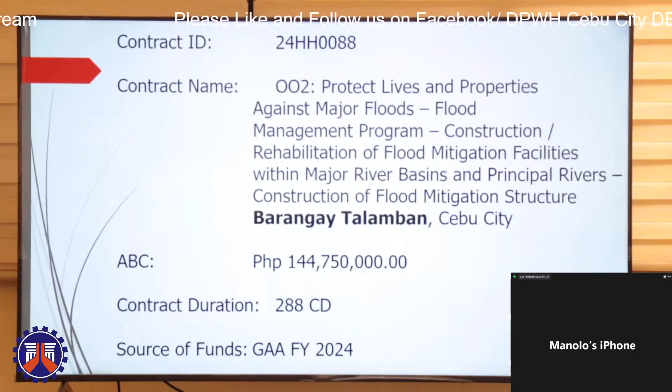So let me discuss first the contract ID 24HH0088 with the contract name OO2: protect lives and properties against major floods, flood management program, construction and rehabilitation of flood mitigation facilities within major river basins and principal rivers, construction of flood mitigation structure, Barangay Talamban, Cebu City, with an ABC of 144,750,000 and a contract duration of 288 calendar days.

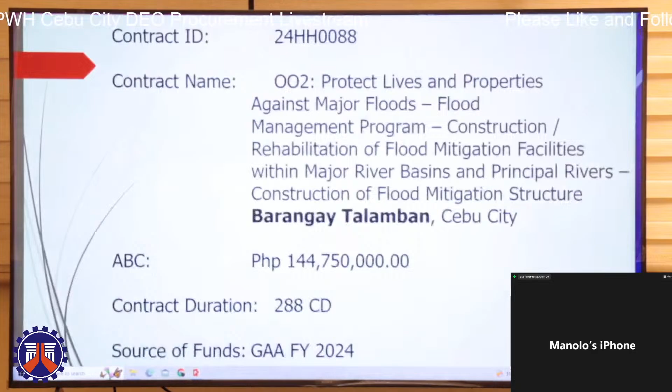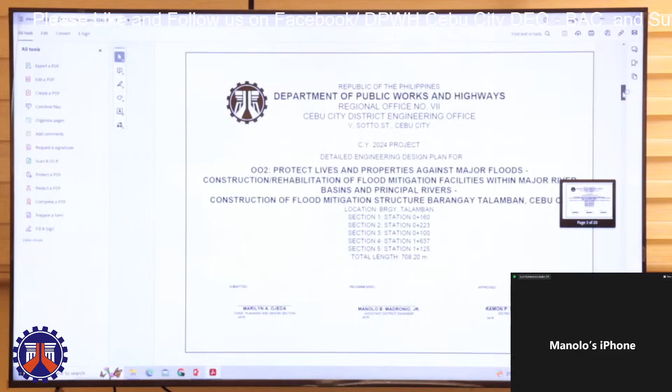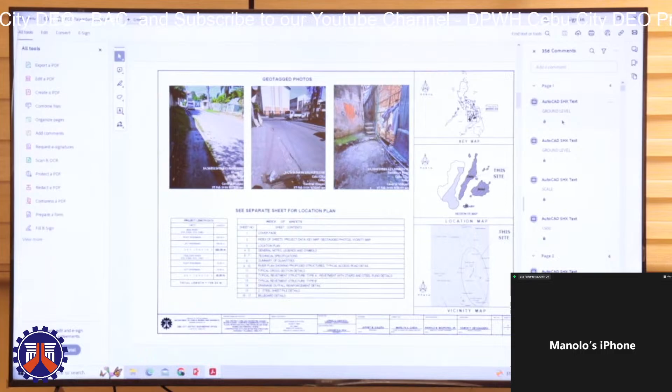So for the detailed plan, we have five sections for this project with a total length of 708 meters. So the first location is along the Butuanon River.

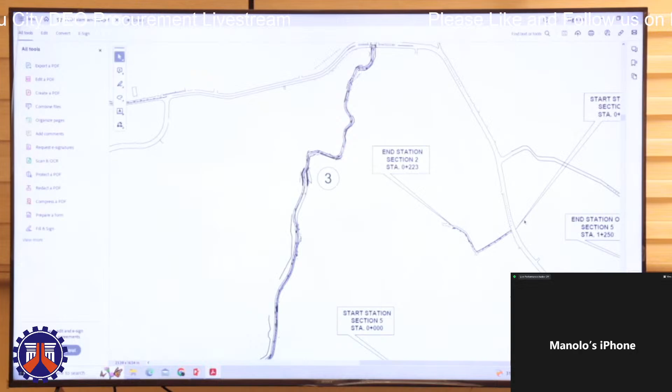So this is the general notes, the construction notes, the technical specifications, then the summary of quantities. First we have the provision of combined field office equivalent to the total contract duration of 9.6 months. We have the operation and maintenance of temporary field office. We have included provision of survey equipment for the assistance to the engineer - kindly visit the technical specification sheet to verify the specs we require for the survey equipment. Then we have the provision of communication facility for the engineer. Next we need to provide permits and clearances, project billboard, safety and health program, mobilization and demobilization.

We have to provide the access road for when going down to the river area. For the main items, we have reinforcing steel grade 40 with a total quantity of 65,987 kilograms, and structural concrete 3,000 PSI Class A, 28 days, 2,314 cubic meters. We have fill and backfill, pipe culverts and drain excavation, grouted riprap, structural steel sheet piles furnished and driven. We also provided pipe culverts in two sizes: 910 mm or 36 inches, and 1.5 meter or 60 inches. Then we have concrete covers, manholes, and metal frames and gratings.

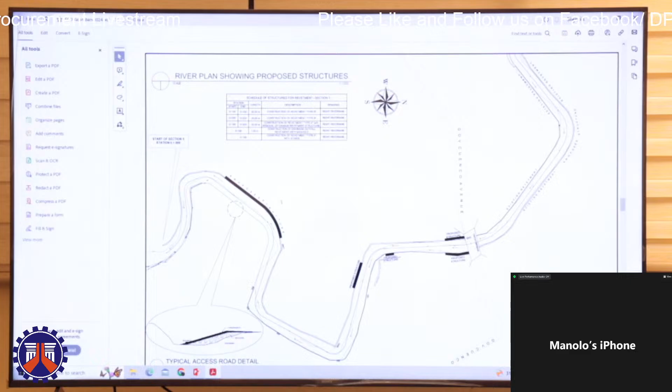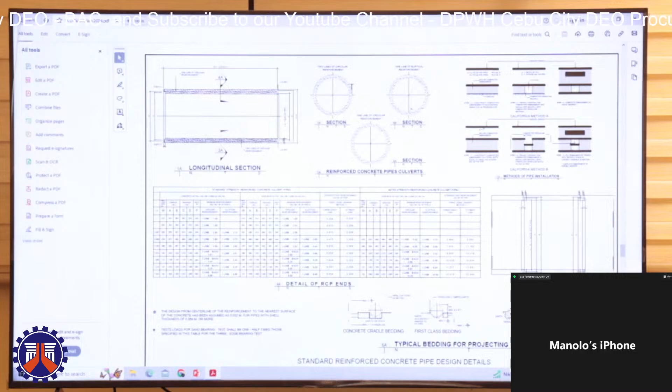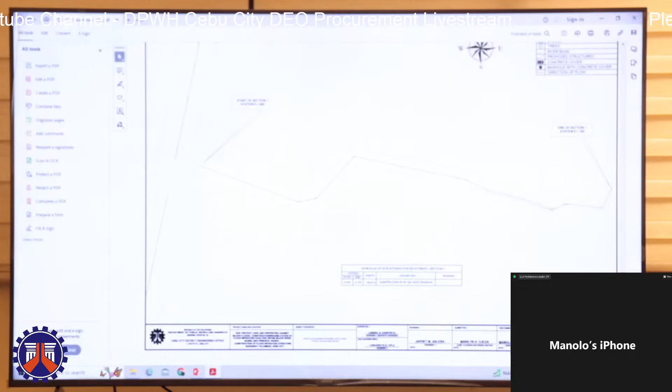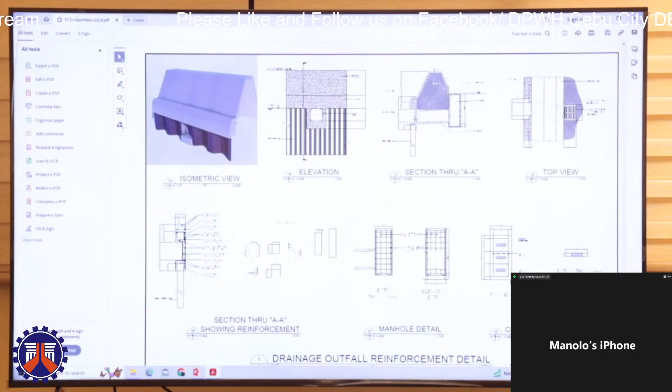Then we have the manholes and drainage detail. I think that's all for the flood control project. So Engineer Felicis will continue for the road project.

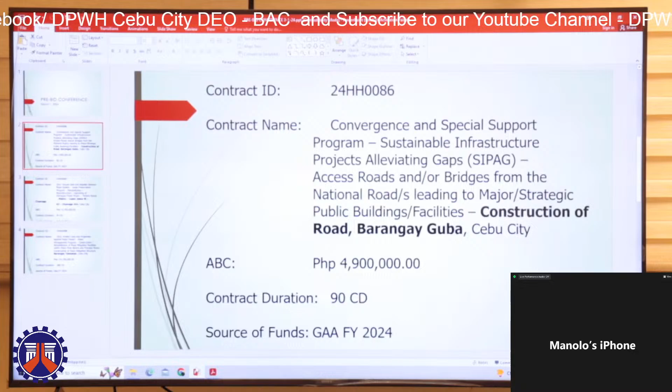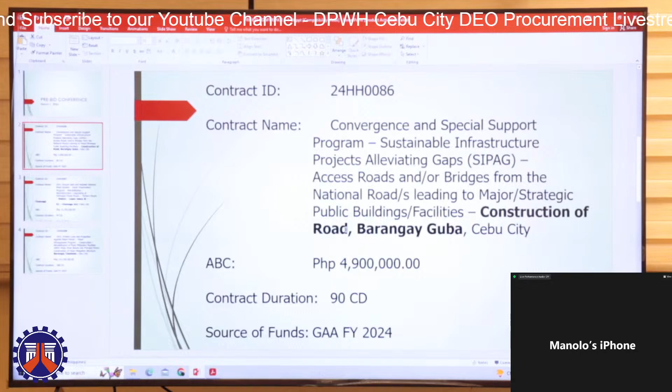Okay, to continue, good afternoon. Next, we have two road concreting projects. First, we have contract ID 24HH0086, construction of road, Barangay Guba, Cebu City. The approved budget for the contract is 4,900,000 pesos, to be completed in 90 calendar days.

So this is the detailed engineering design plan. For Barangay Guba, we have only one road section, right? The length is 350 meters.

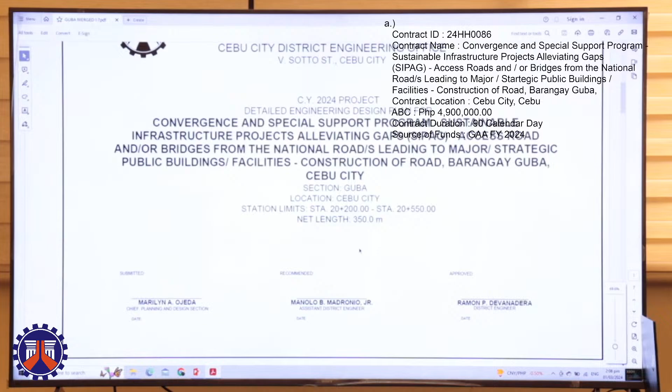Okay, so for the location, the shaded area or region is this one. This road alignment is close to the Guba Barangay Hall. We have taken photographs on site.

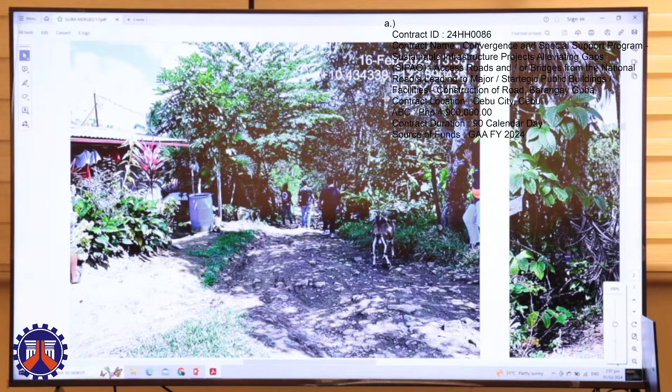This is the area to be cemented. Please take note of the coordinates if you're going to use this. You have to input it in Google Maps to get the exact location.

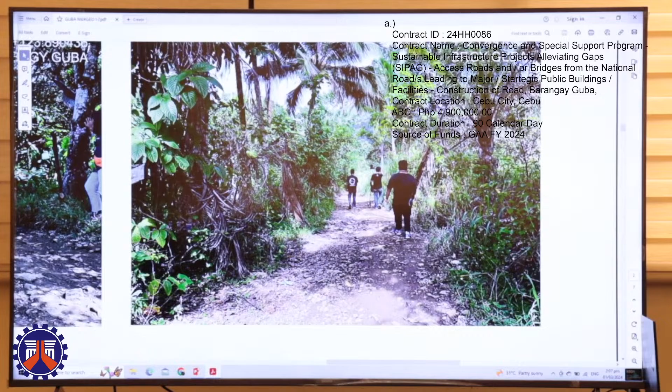So this is the current situation on site. Another presentation of the location through Google Maps, close to Happy Gardener's Place. This is the area for the road concreting project.

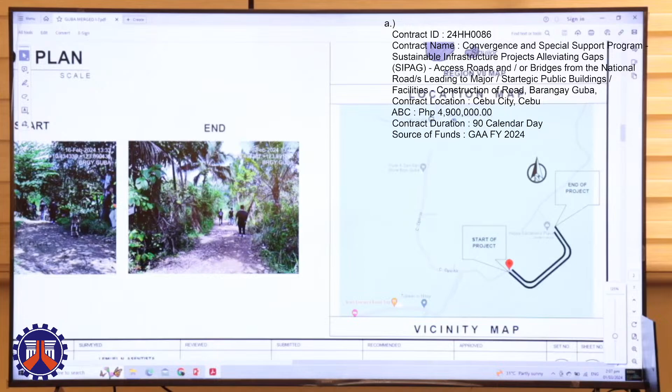For the summary of quantities, we have the general requirements: combined field office, operation and maintenance, permits, clearances, DPWH billboards, GOA billboards, safety and health program, traffic management, mobilization, and demobilization.

For the civil works items, this includes removal of structures or obstructions, the existing RCPC, surplus common excavation, pipe culvert and drain excavation, embankment, subgrade preparation, and laying of the aggregate sub-base course as foundation for the roadway.

Then we have the major work item, Item 311, which is the Portland cement concrete pavement, 200 millimeters thick, with a curing period of 14 days.

And then miscellaneous items include Item 404, 405 for our lined canal, Item 500 for the pipe culverts, and lastly, the precast concrete curb. These are the specifications and construction methodology.

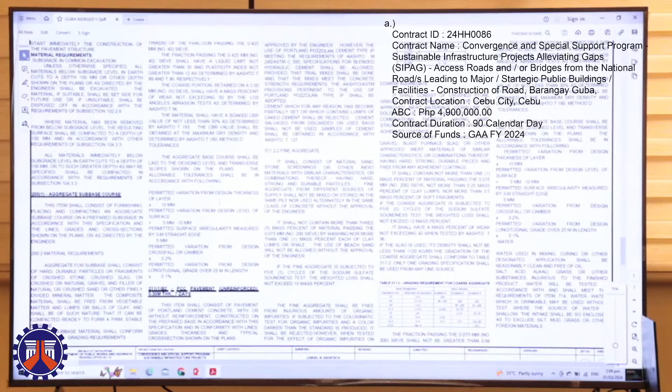Then we have here the typical road section. For Barangay Guba, we are going to maintain a width of 5 meters, two lanes of 2.5 meters width each. On the left side, we're proposing an open lined canal, and here on top is the concrete curb.

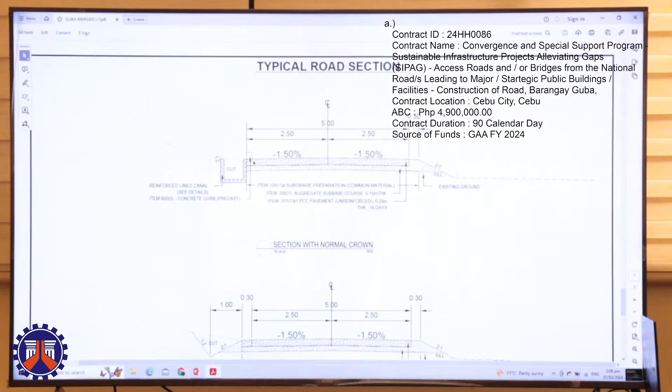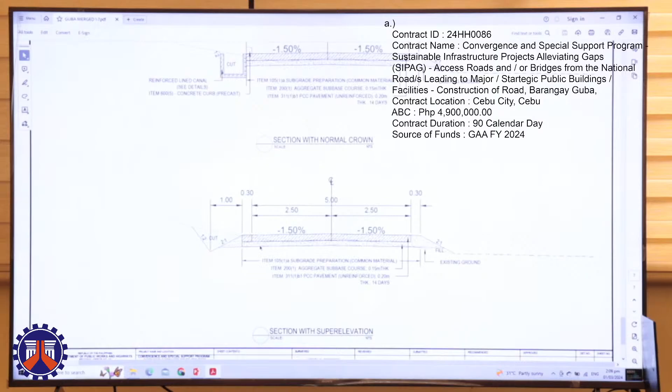So here at the bottom, we have an open ditch if we're not going to provide the open lined canal on the left side. It's just a cut section. On top is Item 311, 200 millimeters thick, and below is the sub-base course of 150 millimeters.

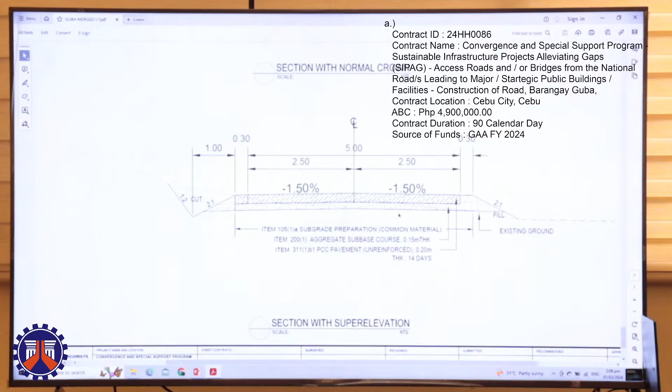Okay, so that's it for Barangay Guba Road Concreting. We now proceed to contract ID 24HH87.

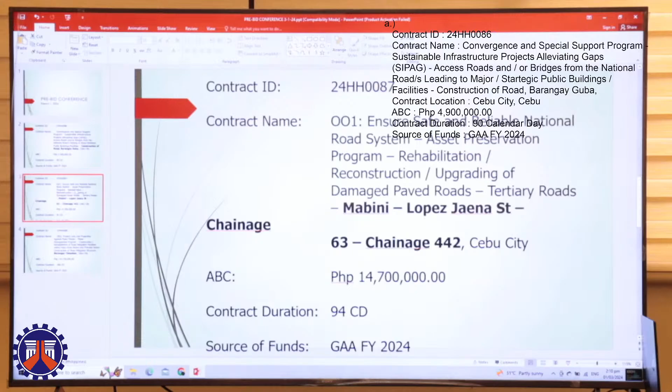Rehabilitation, reconstruction, or upgrading of damaged paved roads, Mabini Lopez Jaena Street, Chainage 63 to Chainage 442, with an ABC of 14,700,000 pesos, to be completed in 94 calendar days.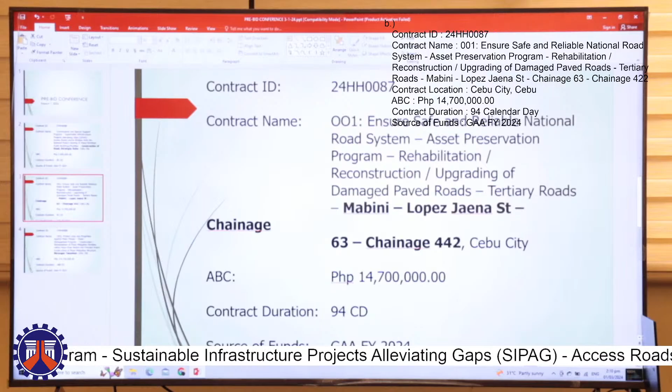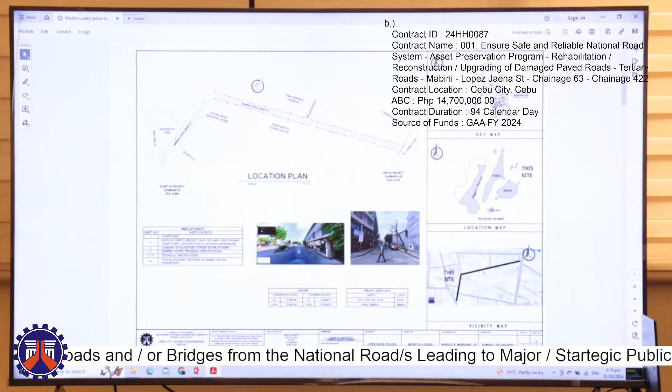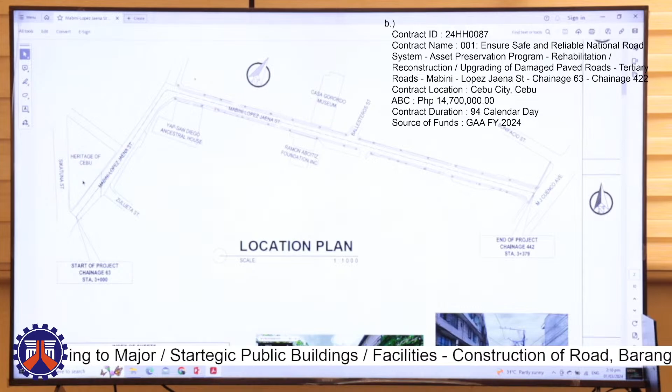For Mabini Lopez, we have a net length of 379 meters. For the location, the starting point will be at the intersection with Sikatuna Street, in the Colon area, right beside Heritage of Cebu in Parian.

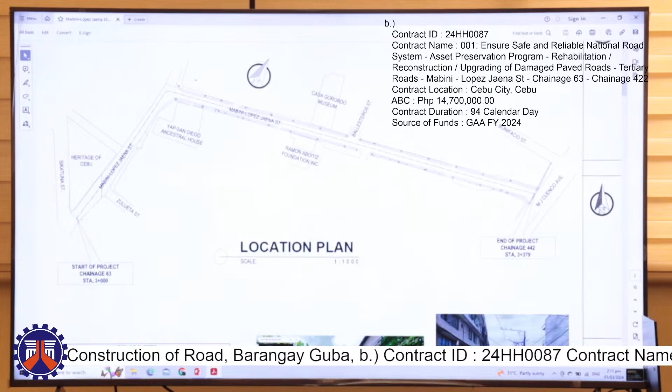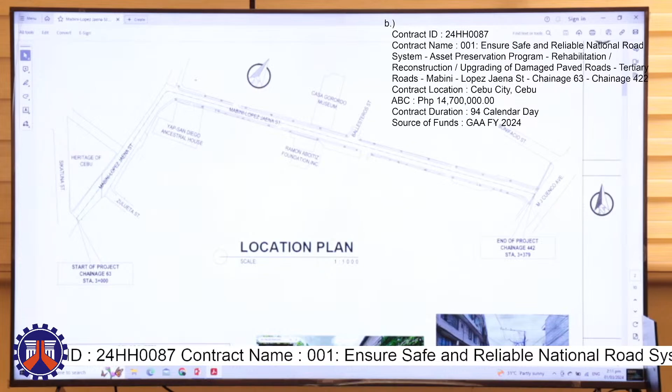So the starting point is here, then going straight, then making a right turn. There is a corner at Yap San Diego Ancestral House up to the MJ Cuenco Avenue intersection. This is the Mabini-Lopez Jaena road section.

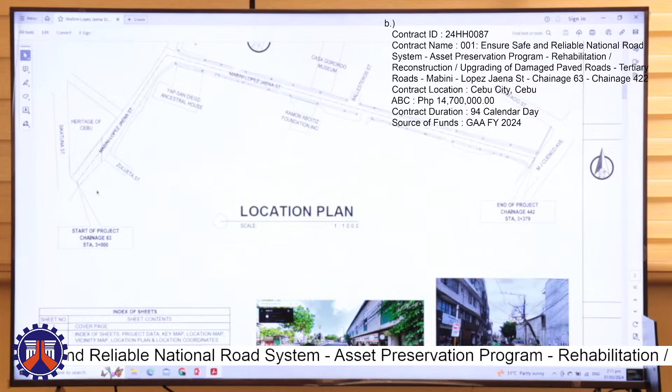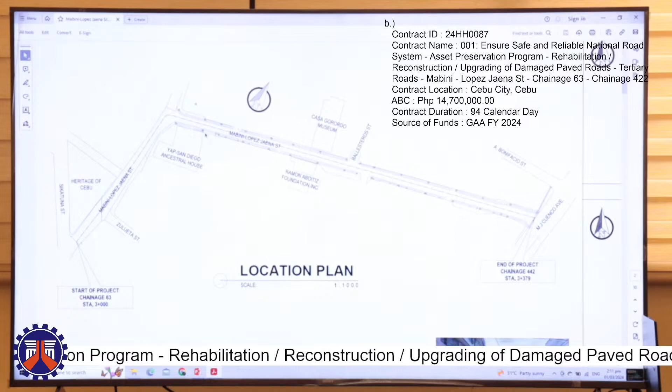This area will be rehabilitated. The existing asphalt pavement will be converted to Portland cement concrete pavement, and we are also going to replace and rehabilitate the drainage structures here, since it floods in this area. We're going to replace it with a new one.

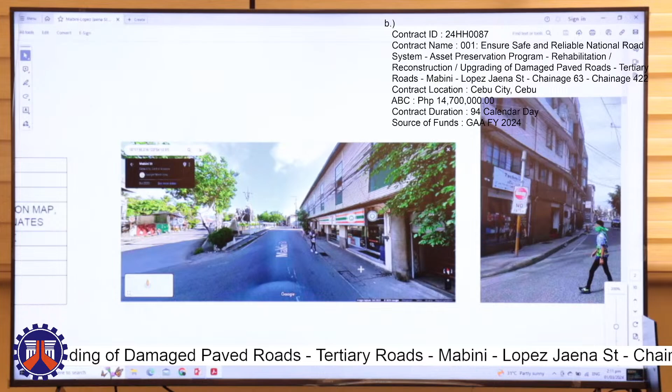Okay, so for the pictures on site, this is the starting point near the 7-Eleven here in Parian, then you make a right turn, then go straight. This ends near MJ Cuenco.

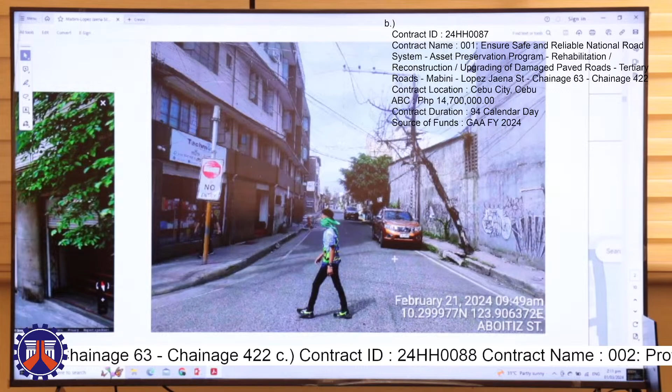Okay, so another representation on the map, on Google Maps, here. Okay.

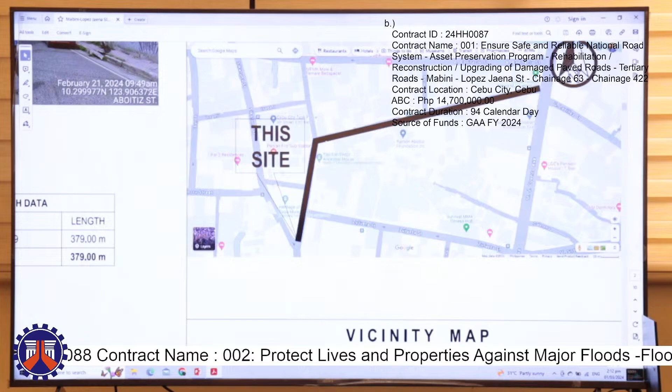So going now to the summary of quantities, basically the same, general requirements.

And then for the civil works, we have removal of the existing sidewalk, curb and gutter, concrete structures, excavation, subgrade preparation, sub-base course for the roadway.

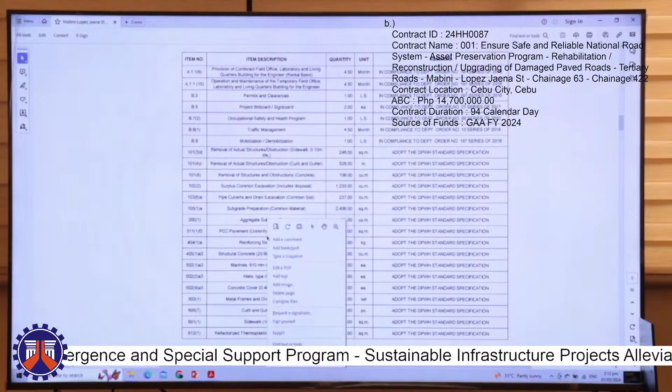Item 311 is 300 millimeter thick, so much thicker. And then curing period is at 7 days, shortened to avoid traffic congestion in the area.

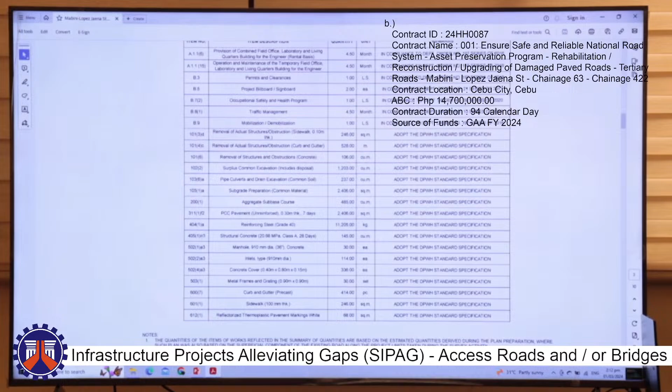So we have item 404, 405 for the line canal. Item 502, manhole. Inlets, item 502.

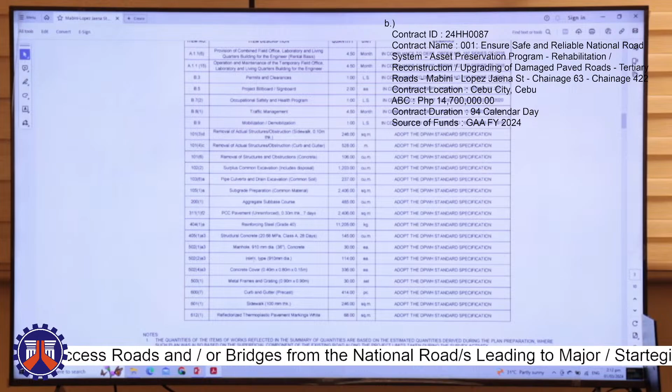Concrete covers, item 502-4A3. Metal frames or gratings, item 5031. Curb and gutter, item 607.

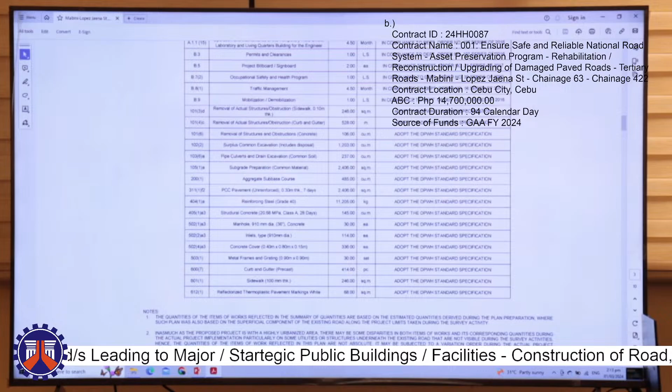Sidewalk, item 601. And lastly, other miscellaneous items, reflectorized thermoplastic pavement markings. White color is the only one needed for this road section.

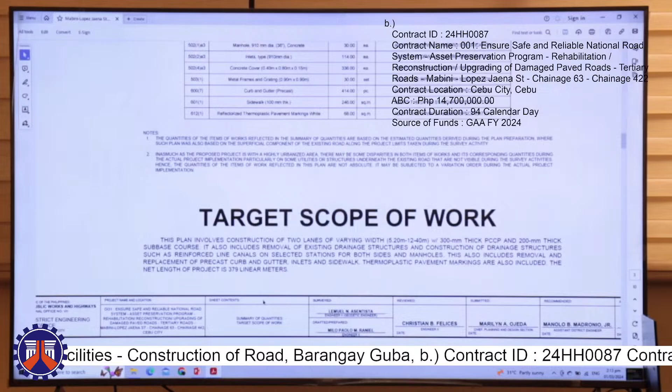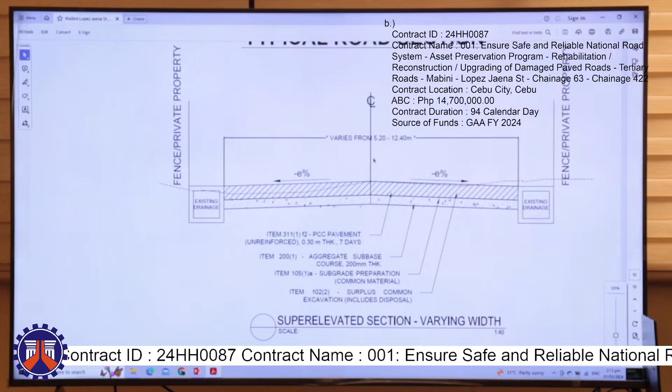Okay, so this one. Basically, item 311 on top, 300 millimeter. Then beneath is the sub-base course of 200 mm.

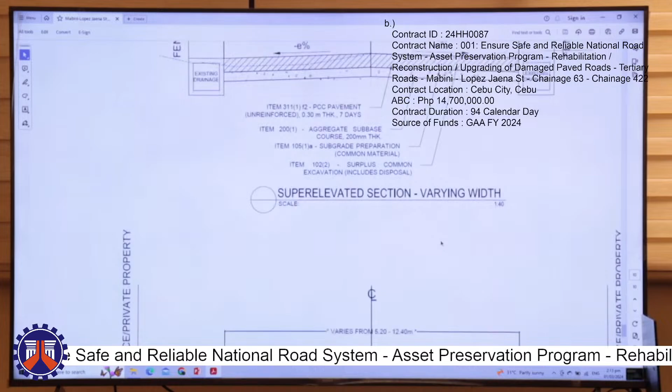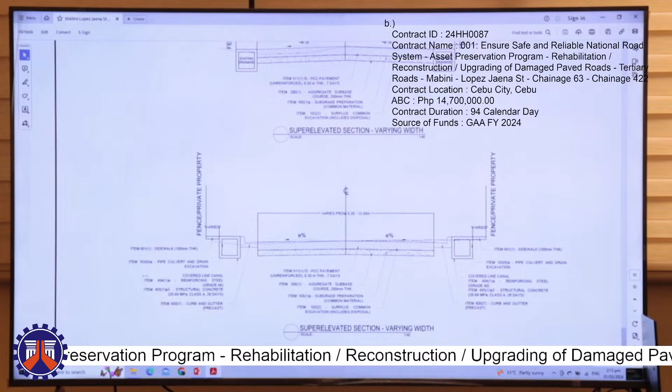And drainage on both sides, that's what we proposed. So we are to remove the existing structures there. Thus we have item 101 that we put in the SOQ.

Okay. So I think that's it for the Mabini-Lopez Jaena road concreting project with drainage structures.